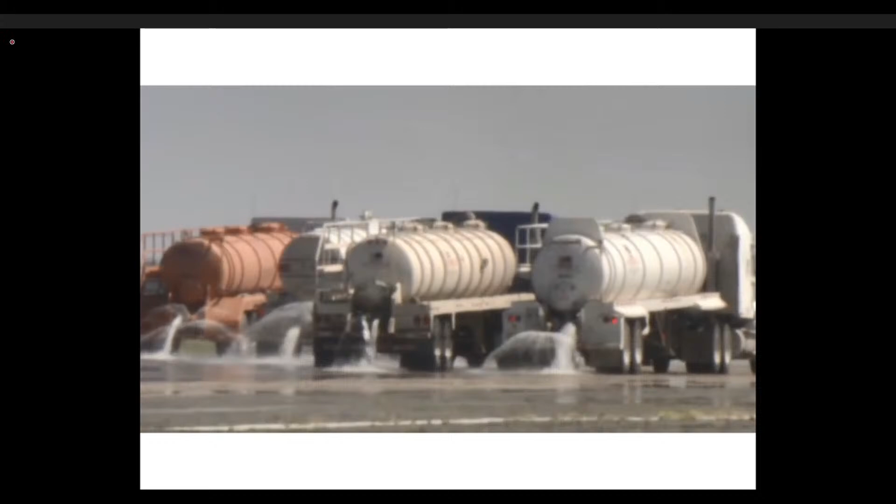Next up, landing the Dreamliner on very wet pavement. Crews dumped more than 50,000 gallons of water on an ungrooved runway. Then Captain Carriker had to pull off 2 landings. We do one with the manual brakes, and then we do another one using the airplane's automatic braking system. We demonstrate that the tires spin up and that the anti-skid system works per design. And we use a normal technique for the pilots, so they don't have to do anything different.

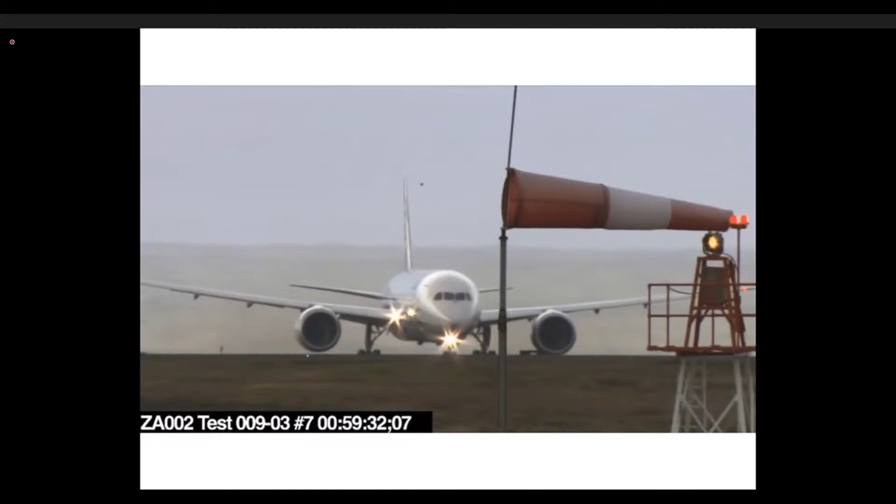Wet is one thing, windy is another. ZA002, the second Dreamliner, fought winds of 30 knots to prove the airplane is designed to handle high crosswinds. One of the kind of conditions that requires more piloting skills. Dan Mooney, Vice President of 787-8 Development, explains how the pilots position the plane for landing. The pilots actually crab the airplane to angle the nose of the airplane into the wind. At a certain point, the pilots will begin to turn the airplane back down to line up with the runway just in time for touchdown. We're really doing well in the airplane part, and it's very exciting to see all these individual parts starting to be added up. And soon, Captain Carriker and the team will be back up in the air to test some more.

So these and many other tests are required by regulatory agencies like, in the US, the FAA before they will certify the airplane to be put in service. So currently, as I mentioned, flight testing is the main means of compliance with these regulations. For engines, it's ground testing. But we would like to explore the alternative means of compliance based on computational tools for aircraft certification in the two areas I mentioned.

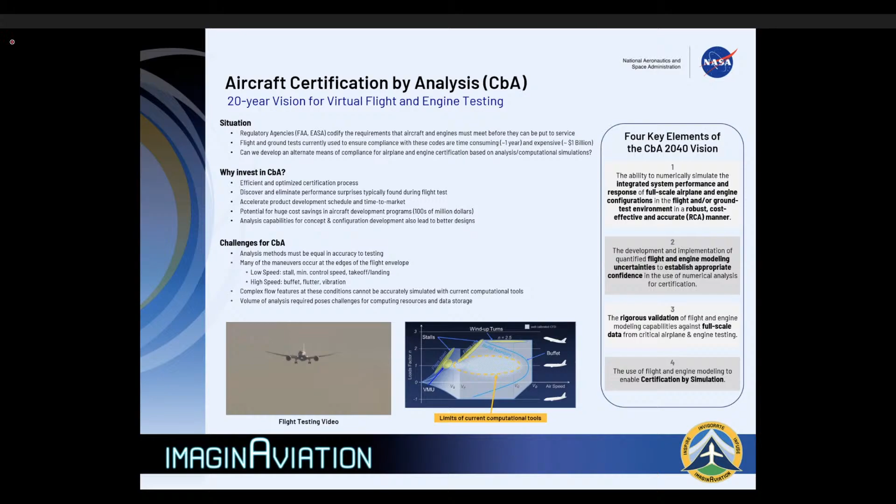But as we go towards the edges of the flight envelope, for example, these areas which have stalls in it, the flow separates, and the current tools that are RANS-based, Reynolds-Averaged Navier-Stokes CFD, don't work well there. And so we need something better than that. Even though, as I mentioned, computers are a billion times faster than they were 50 years ago, we still cannot compute those governing equations from first principles, so modeling is involved. Currently, these equations are solved where all the turbulent motions are modeled. And it's estimated that it may take 80 years or even more to solve these equations from first principles. But for engineering application, we really don't need to solve those equations from first principles. So there are intermediate solutions available. Can you go to the next slide, please?

So we commissioned a study to develop requirements for aircraft certification by analysis. The objective of this study was to develop the requirements for certification by analysis and to establish what it will take to use CBA as an alternative means of compliance with the certification regulation, what the current gaps are, and then develop a research roadmap to develop the technology to reach the objective of CBA. This work was done under a contract with Boeing, and their team members included Pratt & Whitney, an engine manufacturer, and two universities, Stanford University and University of Wyoming. The report came out last June, and it's available at the NASA technical report server. Anyone can download it from there.

The research roadmap that was developed is a 20-year vision for aircraft or engine certification using computations. Since a significant fraction of the flight testing is in the high lift region of the flight envelope, that is where the aircraft is taking off and landing, it makes sense to focus on that application first. And this is also a region, as I mentioned, where most of the testing is done. As is suggested in the report, this will require computational tools that employ scale resolving methods for prediction of aircraft maximum lift, the region where current RANS-based tools do not provide reliable results. A particular scale resolving method is called wall-modeled large eddy simulation, or WMLES.

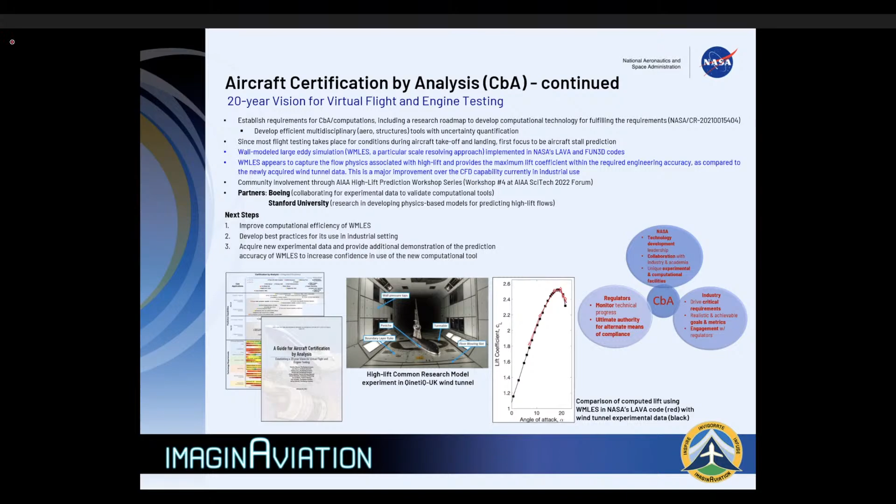This might be a tough one to ask, but we might as well throw it out there because I know it's on a lot of people's minds. What is the time frame in which CBA will really become a reality? That's why the vision was a 20-year vision, 2040. But we have a shorter term vision also. That's why we are trying to attack the high lift part of it. Those tools, I think we are close to getting validated, and the objective is that in the next 5 years or so, we should be ready to employ these tools for those applications.

Nice. So that helps us get a little bit of flavor of the state of the art of your current computational tools, especially in fluid dynamics. But what advances do you think are needed to really enable CBA, or for everyone to embrace it?

Well, I mean, limited to this particular application, of course, we need to have the tools. We need to develop uncertainty quantification so that the user can know what the limits of the answer that we'll get from using the tools are, and whether that's acceptable or not.